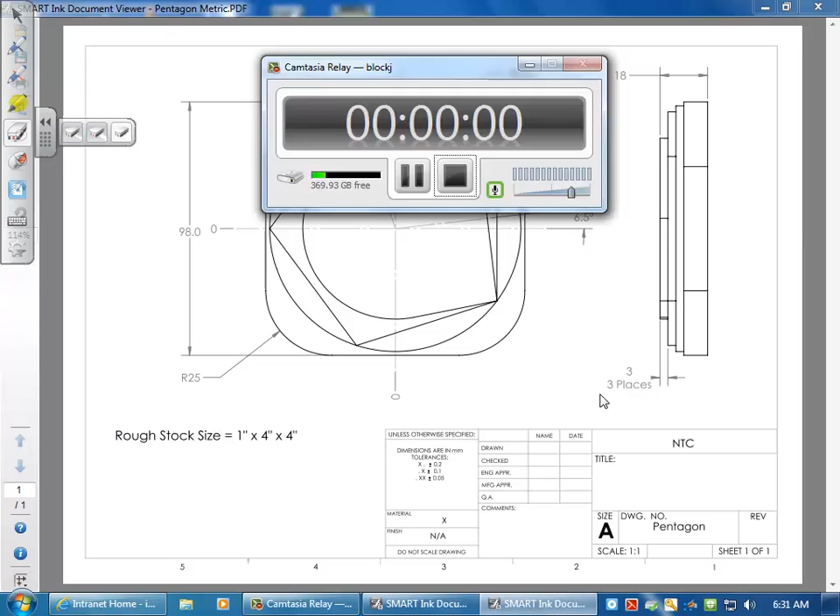Hello, this part will be going over the Pentagon mill project that you'll be doing for App 7. To me, it's kind of an interesting part, more so in the calculations of the tangent points than the actual machining of it. It does bring up some challenging mathematical skills that you need to bring on from your calculations class from your second semester.

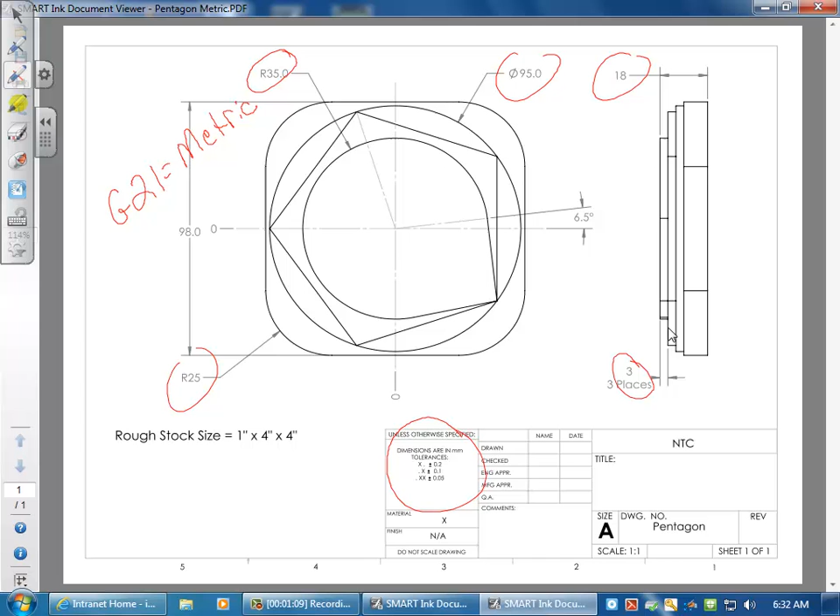As we look at the part, the first thing you're going to notice is our numbers. Not your typical numbers that you've been seeing. Notice down here in our title block, it's in millimeters. Very common in industry to have parts or prints in millimeters. There's two ways you can go about doing this. You can program in metric units simply by using a G21 in the safety startup line. That's for metric units. Normally we see a G20 for inch units in that safety startup line.

This works fine. In this case for programming it's probably actually easier because all your numbers are in metric units. But the problem comes about when you actually machine the part and you have to make sure your part is to print. Unless you have metric micrometers, maybe a metric digital caliper, that's not really suitable for tight tolerances like this. So you end up having to convert these dimensions over anyway.

So what I usually tell students is just to convert all your dimensions over using the 25.4 conversion to get into inch units. That way you write your program in inch units, you're familiar with the units. When you're running your program, you know what those dimensions are. When it comes down 180, you know it's 180 versus maybe 3 millimeters. So the number's a little bit more familiar to you.

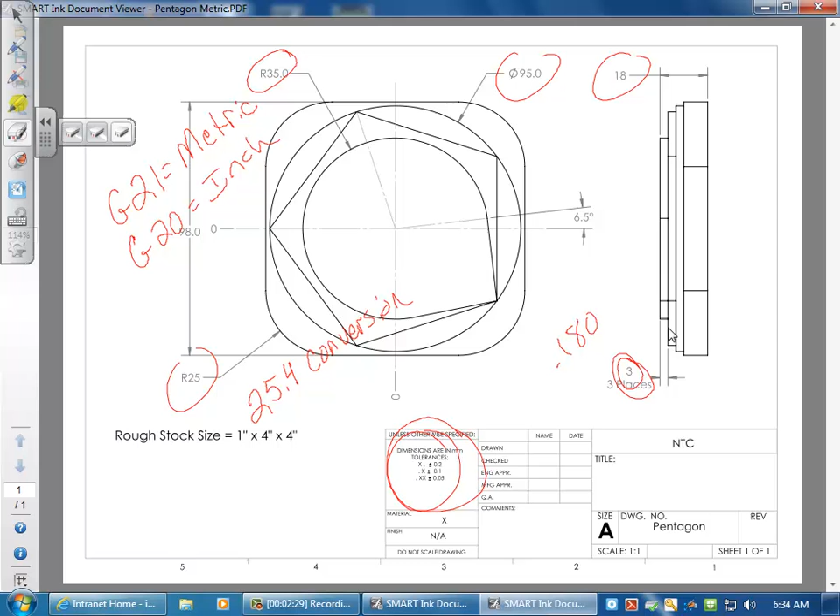I've had students do it in metric, and I can't think of one that really wasn't kicking themselves when they were machining it, thinking that they should have converted everything over to inches. So like I say, that's your call. We'll work with whatever you decide to do. Either way you go about it, the programming is going to be the same.

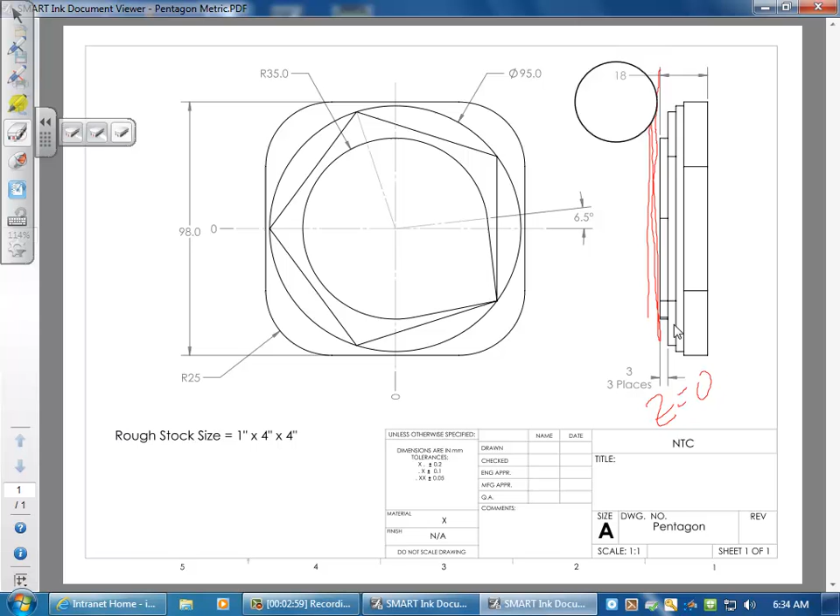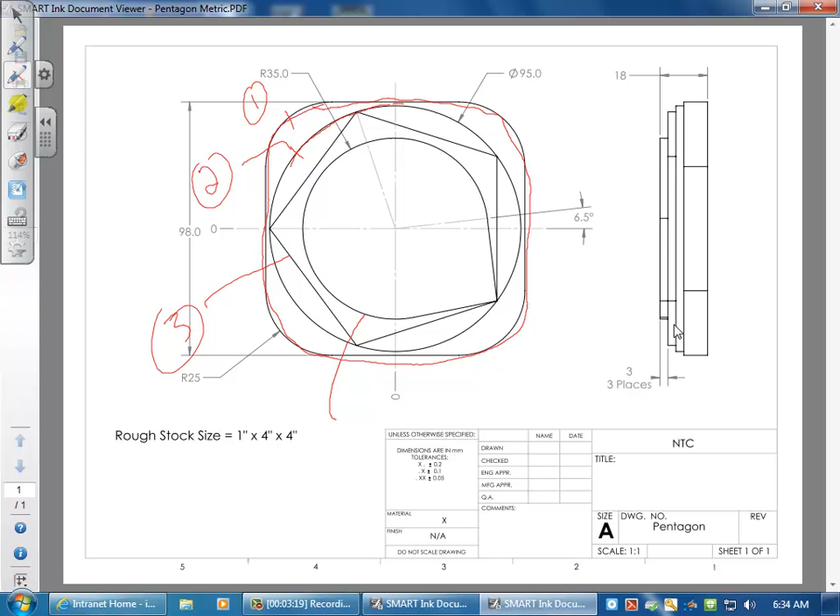Once again, the first operation you're going to do is face off, establish your Z equals 0. So once you have that done, you basically have 1, 2, 3, 4 features that you need to machine out. The way I would go about it is I would do the outside first and then work your way in, do that circle. So this would be first, that would be second, the Pentagon would be third, and then the teardrop, as I call it, would be fourth.

You're going to be doing this depth first. I would do that in probably 3 Z passes. 18 millimeters I believe is around 700, maybe a little bit more than that. So once you have that done, you have this outside done. The part is actually programmed so that this gap is less than a ½ inch. That's your biggest gap that you'll need to cover, so you don't have to worry about your end mill leaving area that won't be machined or making extra passes to clean material up on the outside.

So you got your start point. For the outside, it doesn't really matter. What I suggest, though, is you keep the same start point for whatever you do. It just makes life a little bit easier. So let's assume we're going to start up there. Your first feature, you're going to be coming down, your G41 right there, coming around. But remember, when you come off, you want to ramp off and then do your G40 and then rapid it back to your start point for your multiple passes. It's important that you ramp off so you can complete this arc. So you're going to do that 3 times.

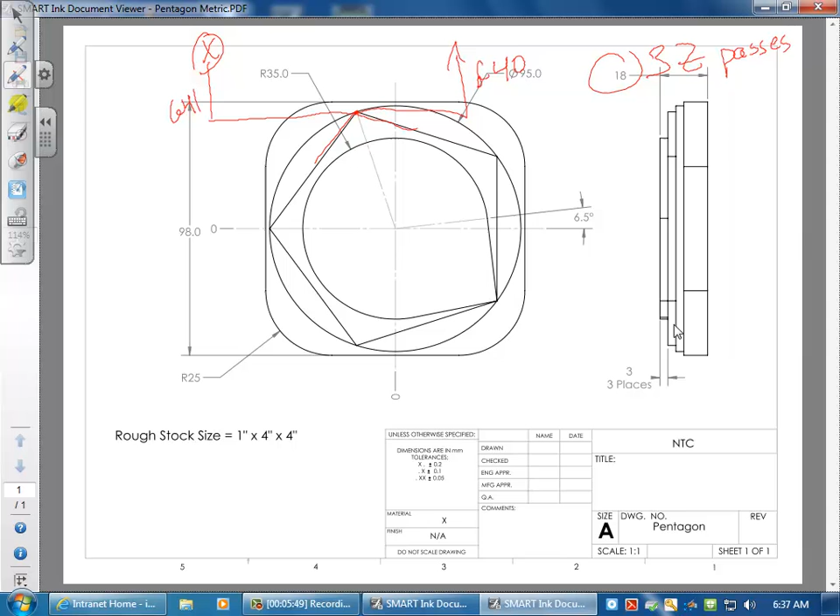Now we're into our pentagon. So we're going to come to this point, G41, and once again, cut all the way around, come up, come over, G40. You kind of see the pattern here. You hit your point, cut off, cut through the part, G40, back to our start point. So that's our pentagon. Now we're down to just that teardrop. Once again, you're going to figure out what this point is. You can very easily figure that off from your radius.

G41, you come to here, to here, to here, up, up, G01, G40. Now here there's no need to go back to our start point because we're done. If you happen to copy and paste and you go back there, I guess it's no big deal, but you really don't need to. What you need to do, you do need to cut off and then G40 to cancel your cutter comp.

And once again, you can do all three of these in one pass, and it'll clean up all that material. And that's pretty much your program. So you're only going to really have three tools. You have your face mill, your high-speed steel rougher, and your half-inch carbide. And so that's all you do. So the programming part itself isn't all that big.

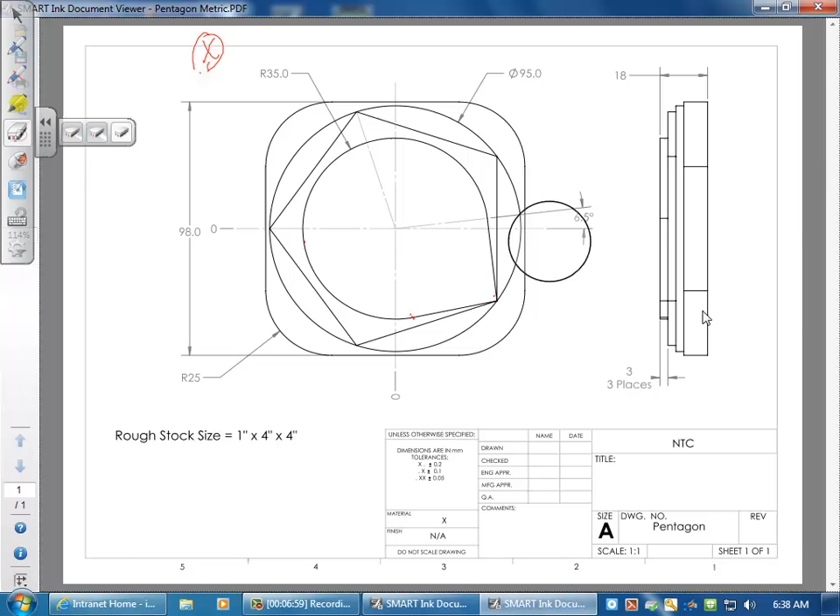But there are some things you need to figure out before you really start programming. You have all your tangent points. Obviously that outside feature won't be that difficult. Nothing you haven't done before. The circle shouldn't be a problem. You have your radius that's called out up here, actually a diameter, it's called out up there for your circle. We do have the pentagon. One thing you have to remember with the pentagon, they all come off that center.

So if you remember from your calculations class, all of these arcs should be the same, or they need to be the same. They go to the center point of that pentagon and out bisects those angles, those intersection points. So all you need to do is take 360 degrees divided by the number of angles. That'll get you this. And from there, you should be able to figure this out. And all of a sudden we have a trigonometry problem that looks something like that. Once again, you can figure out what your radius is off of the diameter.

So you know this length, you know this angle, and this would be your y then, and this would be your x. This point here, just by figuring out these angles are all the same, that angle will be the same as this angle, so that point will be the same. This one here, you can kind of go about that same way. You got a triangle right here. You know what this is, and you know the angle. It'll be half of whatever this is, and then you can figure out your numbers. So that point would be the same as that point, vice versa on your y's. Y's of polarity would be backwards. So that would be your pentagon.

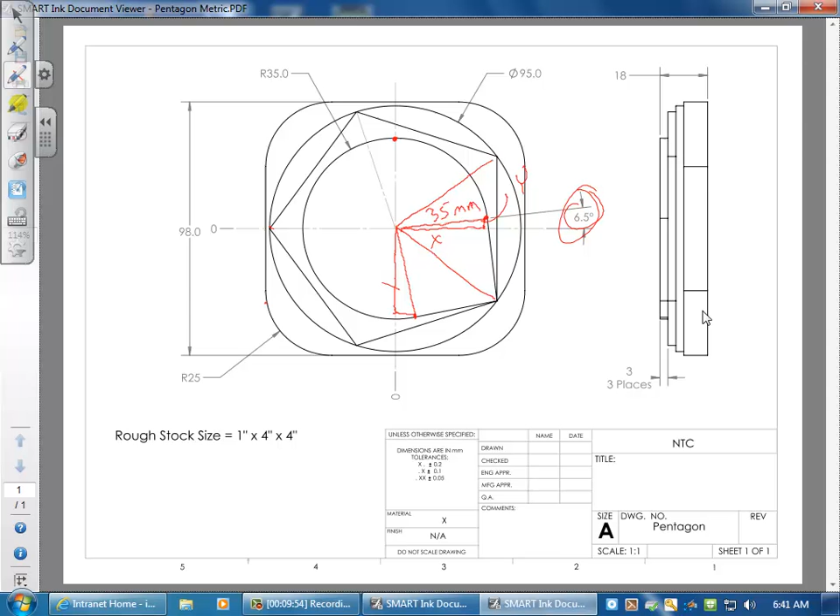What people want to do, for some reason they assume that if this is 6.5, this is going to be 6.5. That is not the case. You can't just assume that. So from here, what you have to do is you just have to basically start writing down what you know, and you work your way back. I'm going to erase some of this up in here. Okay.

So I have these tangent points. I have these two lines that come from one point and they're tangent to that circle. So what that tells me is that these lines are equal. I don't know what their distance is, but I know they're equal. Well, if those lines are equal, that means that this angle has to be equal to each other, because that line bisects that intersection of those two lines that are tangent to the circle.

So from there, you should be able to just figure out, kind of start writing numbers down, what you know. You're going to be using this angle from your Pentagon. That's going to help you. So you go through and just kind of calculate it out, and once you find out what this angle is, then all of a sudden you can figure out your X and your Y.

What I do recommend you doing is, before you start writing your program, find all your tangent points. Find them all for the Pentagon and the teardrop at least, and then come and see me and we'll verify your math before you write your program. That way, if you come up with errors as far as I's and J's, or bad arcs, we know that your math is correct and it's a programming error, versus then we have to go back and try to troubleshoot your math or your program. So we can eliminate one of those issues when you start writing your program.

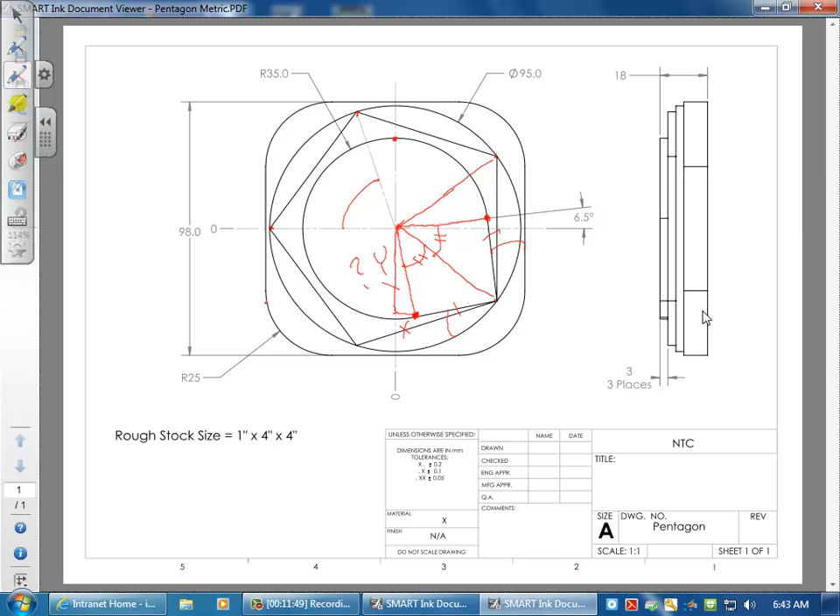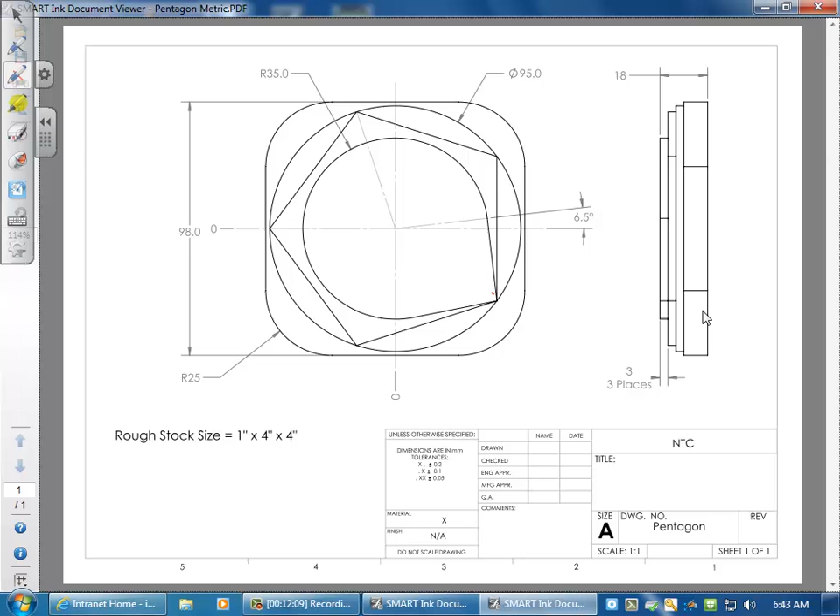Another thing I do recommend you doing is when you start doing this, grab a couple sheets of this print. I'll make a number of copies, because it gets messy if you just do one print. Some people, what they'll do is they'll grab like 3 prints, and they'll have one print that'll have the numbers for the Pentagon. They'll label them, they'll do whatever. And then after they figure out the Pentagon, they'll grab another clean print, and then they'll do the numbers for the teardrop. And that does seem to help a little bit.

So once again, do the math first. Come and see me. We'll make sure your math is right. If you struggle with finding a number, once again, come and see me. We'll help you through it.